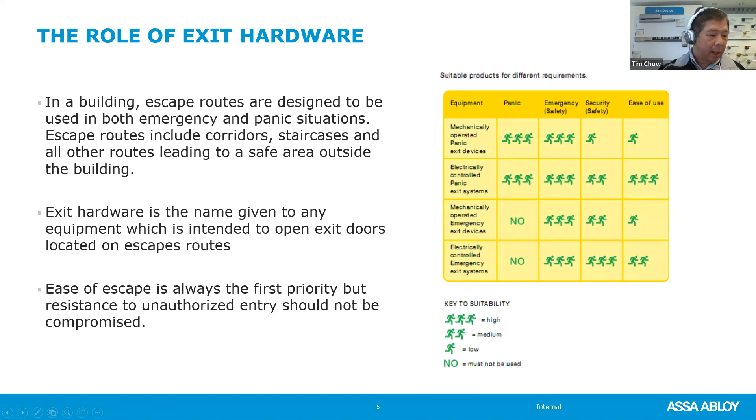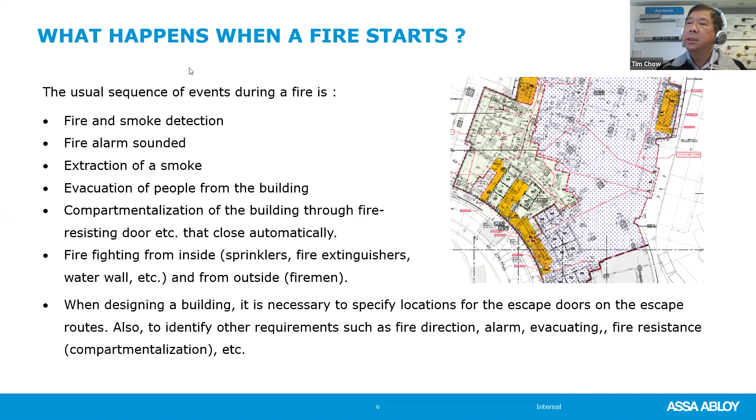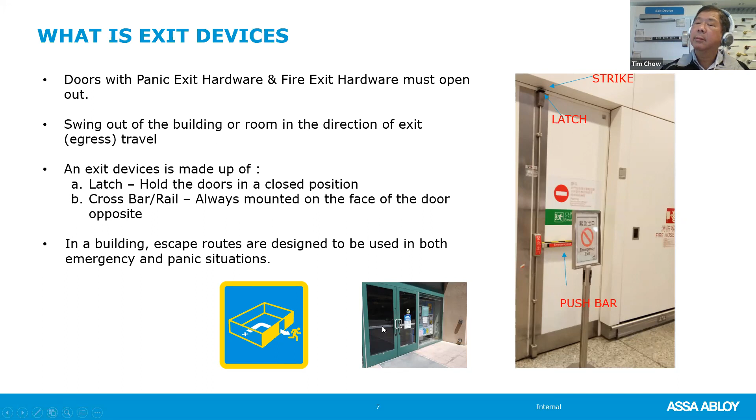The difference between panic and emergency: panic and emergency look the same, but are not exactly the same in real situations. Panic is irrational actions of a large number of people exposed to a hazardous situation in a non-familiar environment. For example, when we go to a cinema or theater, we only know where we are sitting - we are not familiar with the environment inside.

Emergency is different - rational acting of a limited number of people, 3, 4, 5, 6, less than 10, exposed to an emergency situation in a familiar environment. The familiar environment is like our office where we stay every day, or our home where we stay day and night.

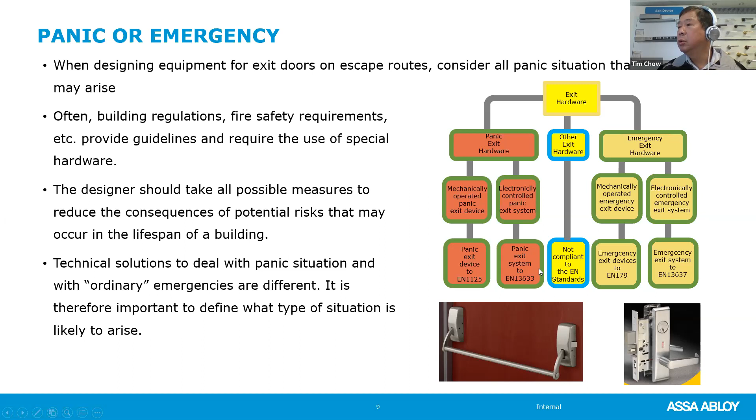As I said, different hardware has different functions and characteristics. We may have to consider whether we can only use mechanical, or we have to consider electronic together. Mechanical works for both panic and emergency, but nowadays we always use electronic plus mechanical together.

The reactions of a large number of people are always difficult to predict, especially in events like a fire in a cinema, restaurant, or museum. The chances are that during panic, many will behave irrationally. Don't expect people to spend time reading the operation manual before they open the door. We are not opening a safe door or a round door, we are opening a panic door and we need to go out immediately. How can we expect people to read a long paragraph, step 1, step 2, step 3? No, sorry. In panic, people have to go out immediately without any consideration.

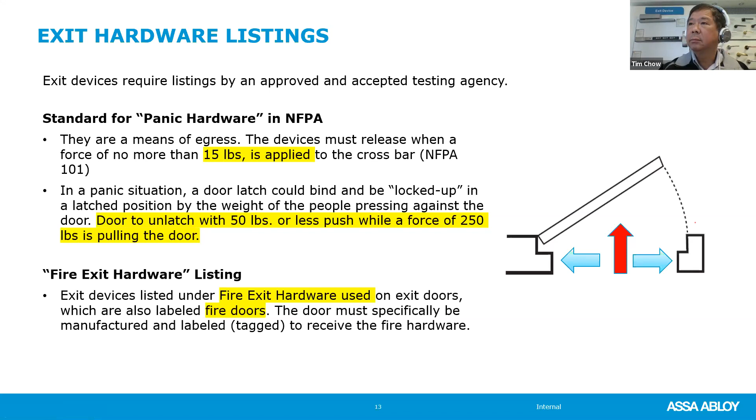Other than UL and NFPA, European standards EN 1125 and EN 179 are also widely accepted worldwide. Both ANSI and EN have very similar principles and requirements for panic, emergency, and performance. EN 1125 is for panic.

Minimum effort and without prior knowledge. That means, as I said, nobody will take time to read the operation manual and then open the door. They will just push it and open. Minimum effort and without prior knowledge. Cannot use the key, only one action.

EN 179 can require prior knowledge, but simple knowledge, like press down the lever handle or press down the pedal. The panic bar is across the whole door, so you can touch any part of the door and open it. But with EN 179, you only press down the handle, which is the lever next to the door edge.

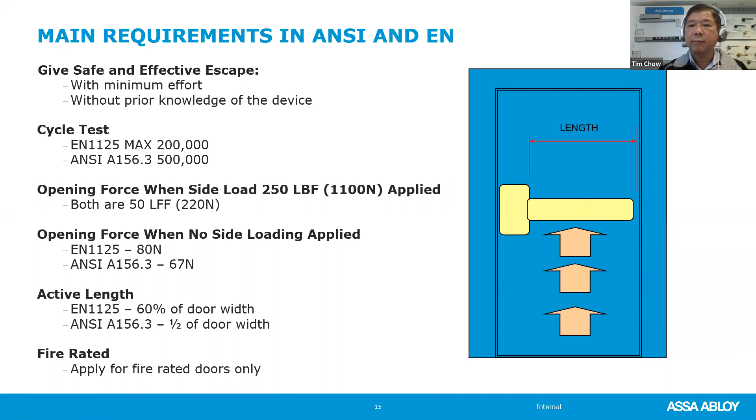The door must be capable of being readily opened in the direction of exit flow without use of a key. The door must be capable of being readily opened from inside without the use of a key — that means low priority, no special tool required to open the door. Just one action: press it to open. The exit door must swing out, opening in the direction of exit.

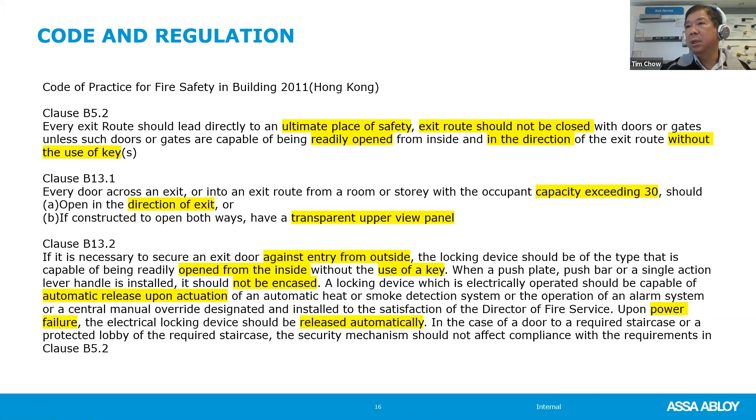I use NFPA 101-2009 version, so those numbers are in the 2009 version. While the current version is 2021, the contents are almost the same. If you'd like to see the new content, you can go to nfpa.org. It's free of charge, but you cannot download, only view the content.

As I said, NFPA 101 is only one of the requirements we need to know. We also need to read it in conjunction with other codes, such as NFPA 80 and NFPA 70, for any particular requirement. For example, the lift machine room door must be self-locked, self-closed, but that requirement is not in the code of practice, it's stated in the lift construction requirement. Different tenants and occupants may have different requirements regarding the exit door.

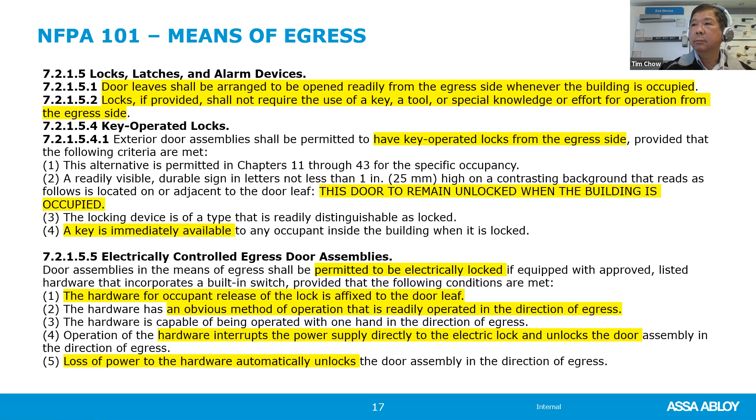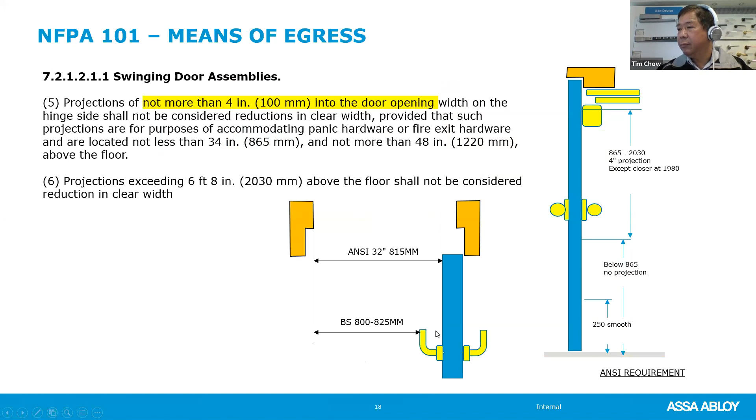The projection of the hardware into the clear width, from the door to the clear width, must be a maximum of 4 inches. The projection of the closer arm has no restriction when the hardware is installed higher than 80 inches, it's not considered. So make sure the panic bolt is installed between 34 to 48 inches, and the projection of the hardware from the door to the clear width is no more than 4 inches.

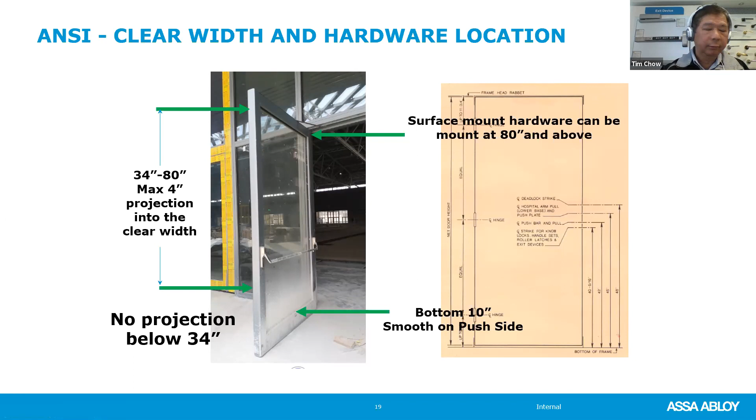If somebody is running down and finds the staircase blocked by fire or smoke somewhere, he must go back and find another exit. So if all the doors are locked, how can he go back? He will die. So there's a requirement that there will be a door able to re-enter into the floor every 4 floors.

If all the doors in the staircase are locked, that will be fine if there's another passage - 3 passages will be fine. Just in case you need to lock the doors in the staircase, make sure maximum 4 floors in between is able to re-enter, at all times.

There will be signage on the door that tells you if you can't go in - go up 2 or down 2 to find an exit door. Or maybe all the doors in the staircase will open during fire - we can use an electric control door. So it will be locked, but the door will open during fire. Maximum 4 in between.

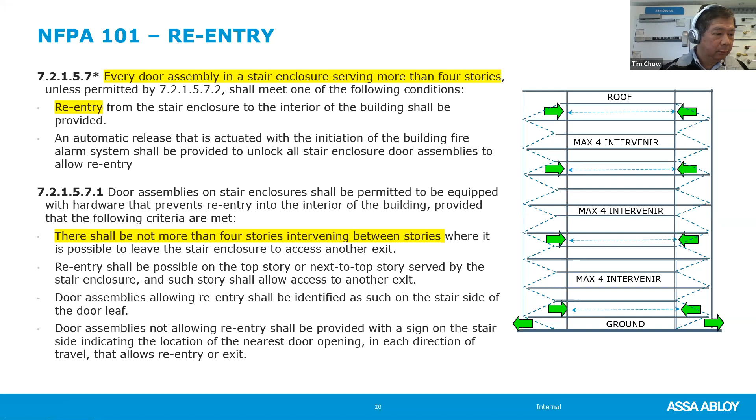Panic hardware is required, but panic hardware is not required in every leaf of the door. In our home and in our office, we are allowed to use a knob with not more than 1 additional releasing operation. What does it mean? Looks like a door guard, or maybe you have an auxiliary lock, or a fountain, or a door guard.

The mounting height of the hardware should not exceed 48 inches above finished floor.

How about a pair of doors? 2 options. Each leaf can be provided with a releasing device, but this one can open independently - it does not depend on the release of one leaf. For example, I want to open this one - I can open this one immediately. I should not need to open this one first; either one can open it immediately. It should not rely on opening this one first.

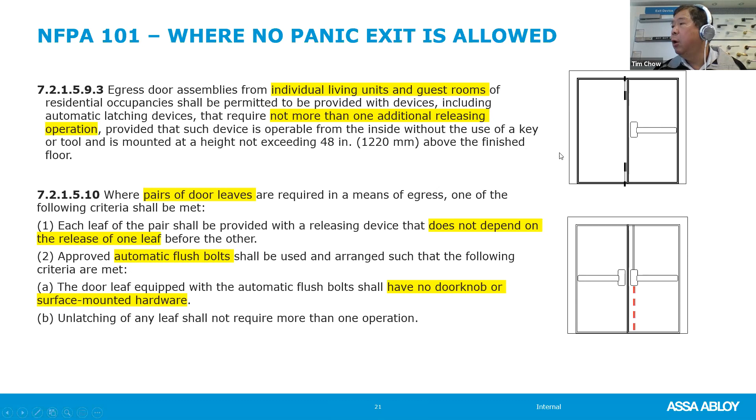The special locking arrangement - normally when we say special locking, we mean electrical hardware. Delay egress locking system is allowed in low and ordinary hazard conditions. So if it's a high hazard area, you cannot use delay egress because those areas look like the chemical factory. Cannot use delay egress there. But in the hospital, in the hotel, yes, you can.

If you install delay egress, the door must be unlocked when the sprinkler system or the firefighting system starts. When there's loss of power or electricity is down, the door will open. Normally, the doors should open within 15 seconds.

You can adjust it, maximum 30 seconds. But more than that, the architect or the fire official has to approve it for more than 15 seconds. Same standard applies - no more than 15 pounds or 67 Newtons on the door.

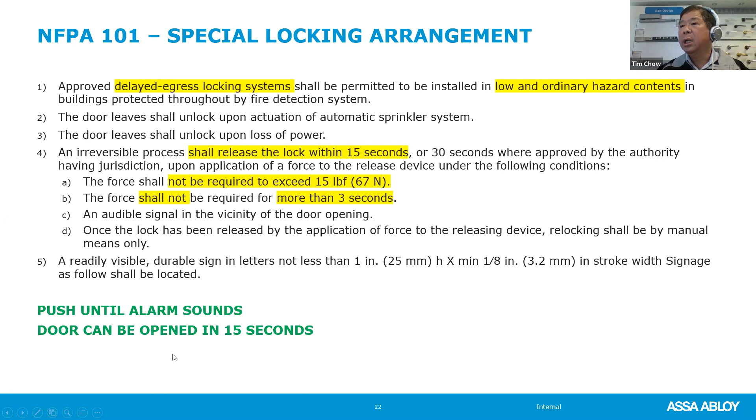And also, signage must show adjacent to the door or on the door: 'Push until alarm sounds. Door can be opened in 15 seconds.' That's the requirement.

Other than the staircase, how about the front door that's also used as exit? When is EAC required? Simple - a sensor on the egress side detects the movement of people. When someone approaches the door, the door unlocks, and the sensor will open the door for you.

When there's loss of power, the sprinklers start, the alarm sounds, it automatically unlocks the door. There will also be a manual release next to the door within 60 inches. Anybody can use the manual release. Don't rely on the reception to press the button for you to leave - it must be a manual release, very significant.

So, push to exit within 60 inches - sorry, within 60 inches. Okay. When the fire alarm system activates, the door should open in the direction of egress. That means even though the alarm sounds, the doors only allow you to go out - it doesn't mean you need to lock the door from outside. Only allow for egress, not ingress. Ingress is a different method.

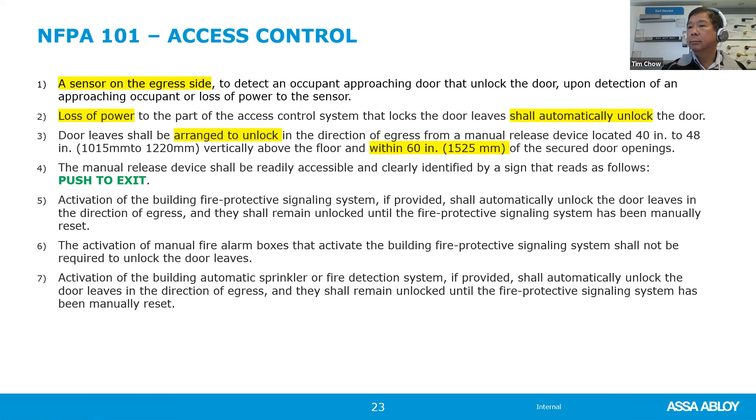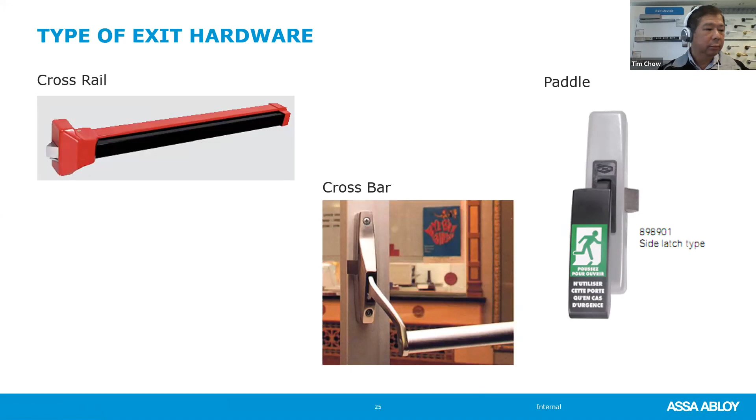Access control - you can see it can also be in the cross rail or the paddle, but not available in the crossbar, only the cross rail or the multi-point. It can be standalone or remote control. You can use the battery, or we can connect it to a power supply.

Latch retraction - this latch can be retracted in the dogging. The latch can be retracted remotely by electricity. But this latch must be able to release during power failure. We can retract the latch, so the door can go in and out - it just looks like push and pull.

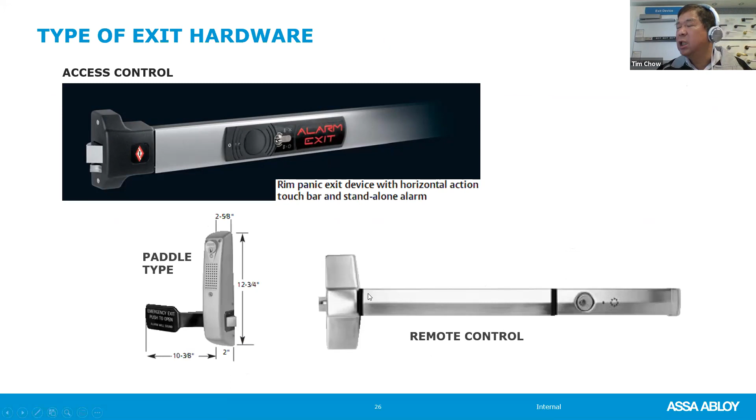Or when we use auto-operated during normal operation. When there's power failure and the alarm sounds, the latch will go up because regulation requires the door must be self-latching and self-closing. Latch retraction is good for quiet operation - looks like it's used in hospitals, conference rooms, theaters, and libraries.

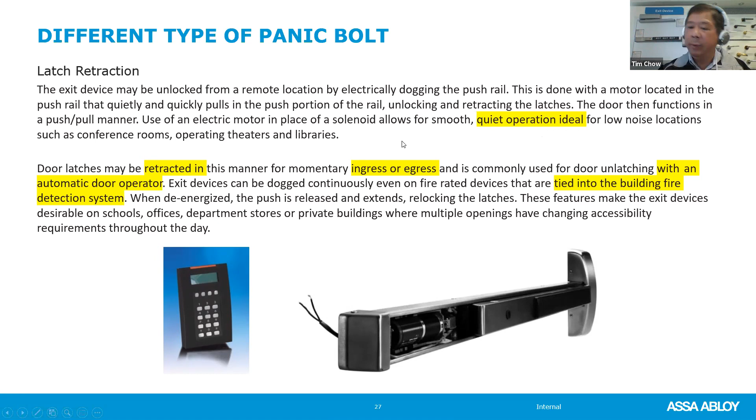We already talked about delay egress. But if you have a system, I suggest you consult your security consultant. When an electrical system is used, an exit system is required. The EN 13637 panic exit system allows you to use a break glass connected to a panic bolt, but that's not allowed under UL. I personally also don't suggest a break glass working with a panic bolt.

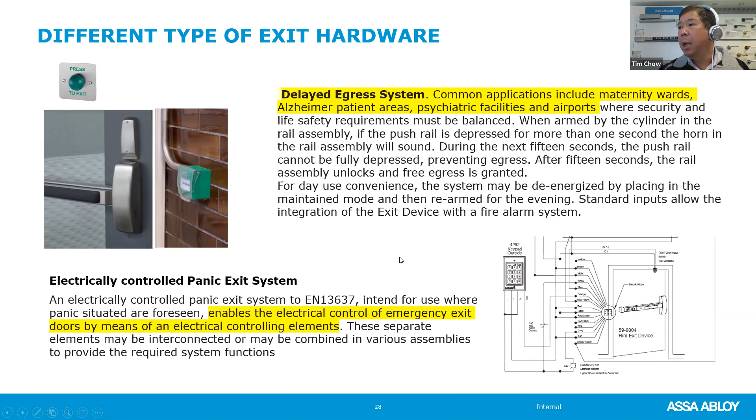Why? Because it should be one action to open. To break the glass and open the door, there will be two actions. So check with your security consultant. EN 13637 allows break glass with panic bolt, but it's not allowed in UL.

The panic hardware shall always be seen in all light conditions. Illuminated panic bolts should be a good choice, to make sure everybody can always see the exit in all lighting conditions. So illuminated panic bolts will be a good choice.

The door being closed doesn't mean the door is locked. On the other hand, when the door looks locked, it doesn't really mean the door is closed. So we can add some monitors next to the door latch, the bar, or the door contact, so we can know whether the door is not closed or not latched.

Dogging device looks the same as latch retraction. But dogging is only manual - don't use a key or Allen key to press down the bolt, the paddle, or the bar to keep the latch in retract position. This is not allowed - mechanical dogging is not allowed in the fire door. If you want to use dogging, you have to use electric dogging, to make sure the latch goes out for fire door requirement.

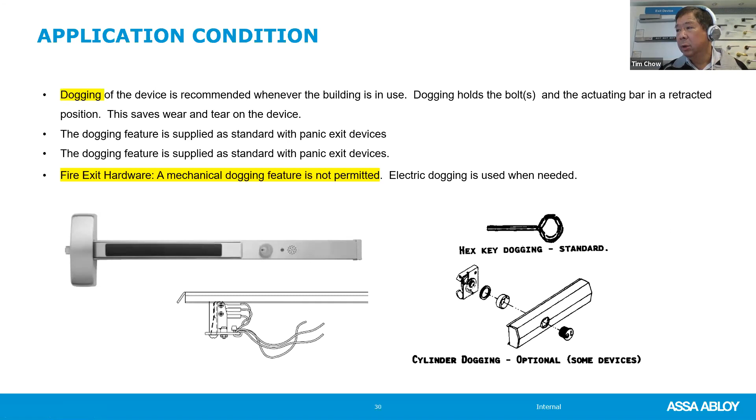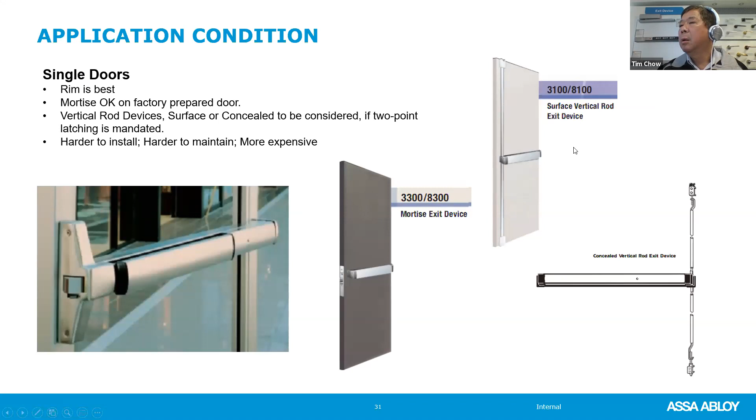Single door. You can use any type of the hardware: rim panic, mortise panic, concealed vertical rod, overhead, or surface mount panic bolt. You can use any for a single door.

But if the pair door will be different. Application hardware is different for pair with overlapping astragal or without overlapping astragal. They're different.

If you use a mortise type panic bolt but don't use an open back strike, then you still need to use a coordinator.

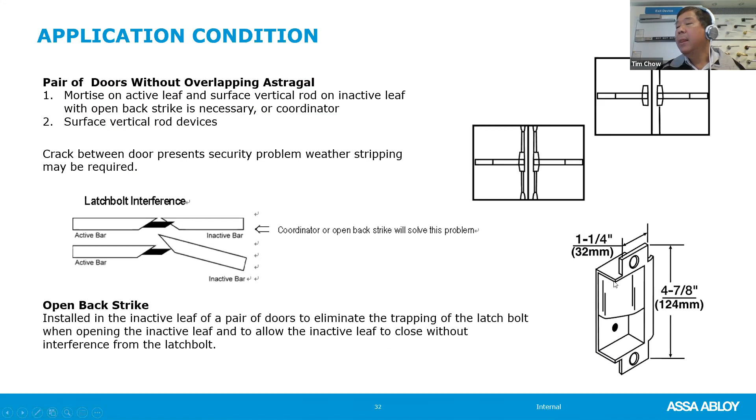If the door has overlapping astragal, then you need to use a coordinator. This one you don't need, unless you install a mortise lock, then you can use an open back strike or coordinator. But if overlapping astragal, if the active door closes first, you cannot close the inactive door.

If we are opening this one, it will automatically push the other one out, but it will not affect it. So if we are pushing out the inactive, it doesn't matter, it will not affect the active leaf. So if a pair door has overlap, you have to use a coordinator. The coordinator helps you make the closing sequence of the door.

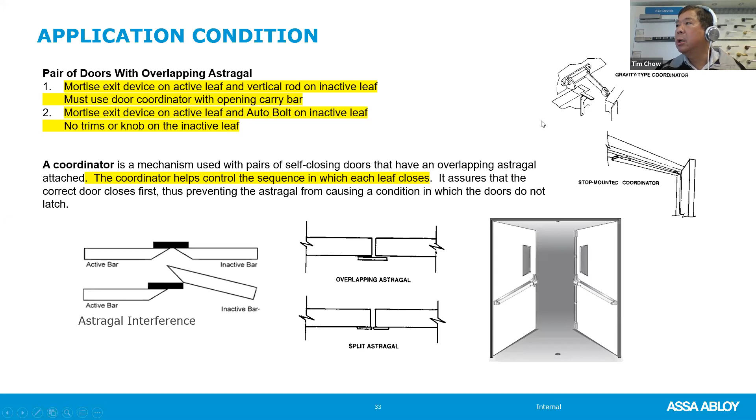Thank you, thank you, thank you.

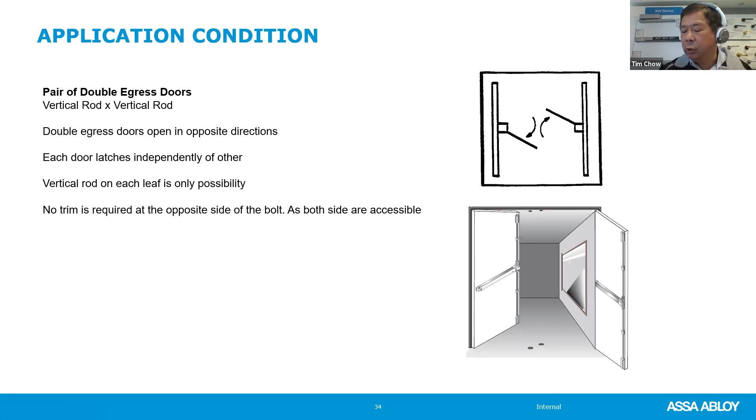I have talked about the panic exit today. Thank you so much for listening. So do you have any questions? I will try my best to answer it.